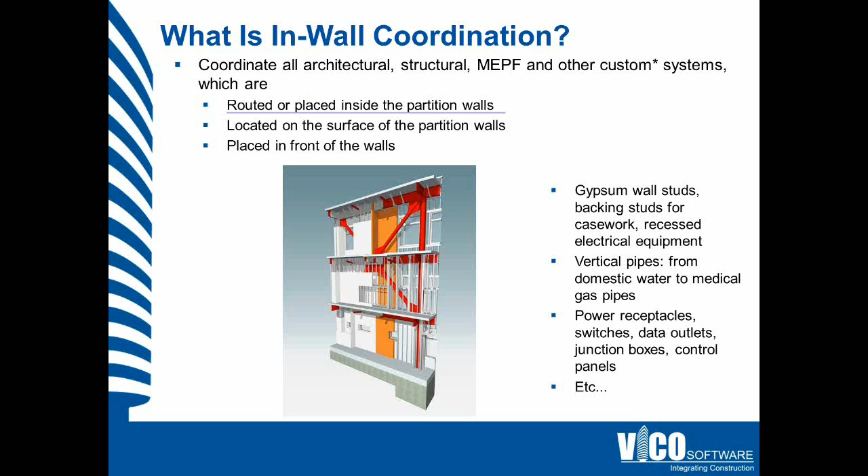If you want to see some examples, for the partition, what the partition walls contain inside, we can think of the structure of the partition wall itself, so the metal studs that hold the partition. Or if we want to place, for example, heavier casework on the partition wall, we obviously need some backing system for that, that you can see on this next image in red. So those backing systems are holding the heavy casework.

But we obviously also have some piping routed in the partition walls. In normal or standard cases, in standard building types, it is most likely domestic water or mechanical piping. But in case of a hospital or a medical building, you could also find medical piping, medical gases, and all the different kinds of systems.

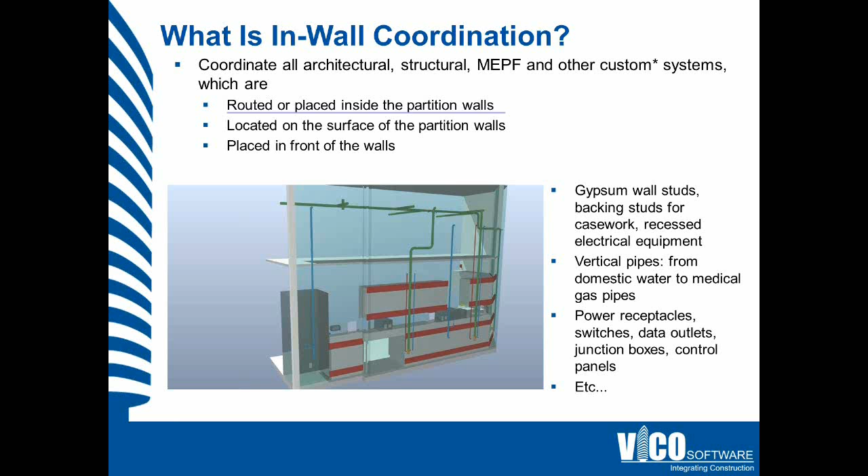You also have some small pieces of equipment, some elements placed on the surface of the wall. However, it definitely requires some supply system which is routed inside the wall. So if you think of data outlets, power outlets, switches, receptacles, fire alarms, those are mounted on the surface of the wall. However, they obviously need some pretty complex conduit system behind it. So it obviously requires space as well to place the junction boxes and to get from A to B in terms of outlets.

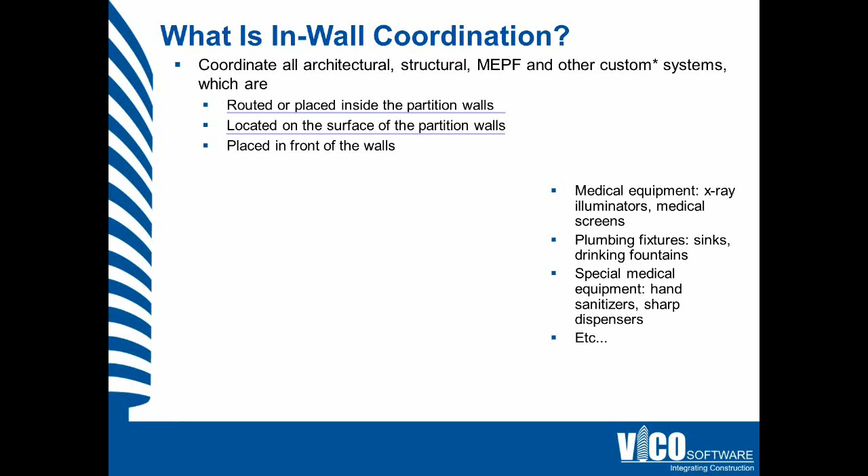Let's see a couple of examples of what we can place on the surface of the partition walls. And as my case study is a medical building, I will show you a couple of examples of such medical equipment. Let's start with the first one. I think it's familiar for all of us. It's a hand sanitizer. We can even find them in supermarkets all around the place. And it doesn't seem to be a big deal to place it on the wall. No one would really think that it has to be coordinated.

However, if you think of a medical building, a patient room, you can be sure that the nurses and the doctors who enter the room would touch such a piece of equipment first. So this would be the first thing that they touch when they enter the room, and also the last thing that they touch and use when they exit the room. So it's quite important to locate it in the right place, and it will drive and define the location of other pieces of equipment which maybe require supply and some routing in the partition wall. So it is really important to locate it in the right location.

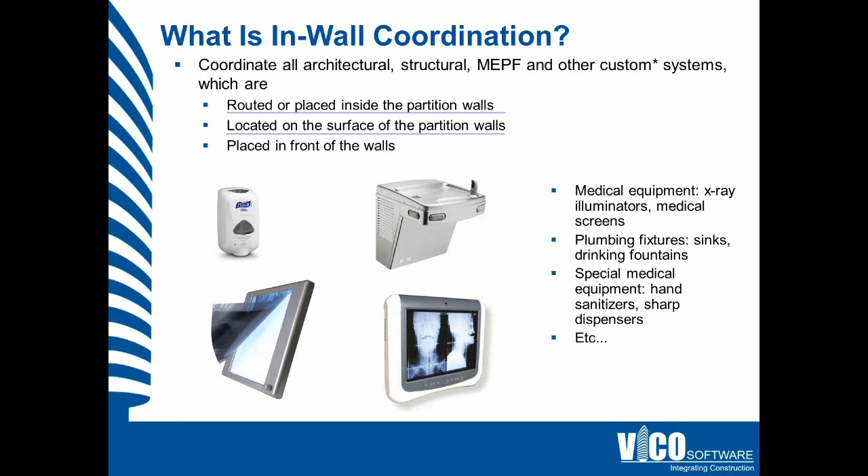As you can imagine, the doctors can review and see different pieces of information on such screens, so they have to be routed and connected to the right server. They have to be connected to the necessary computer. It makes it a bit more complicated to have the right data outlets in the right positions.

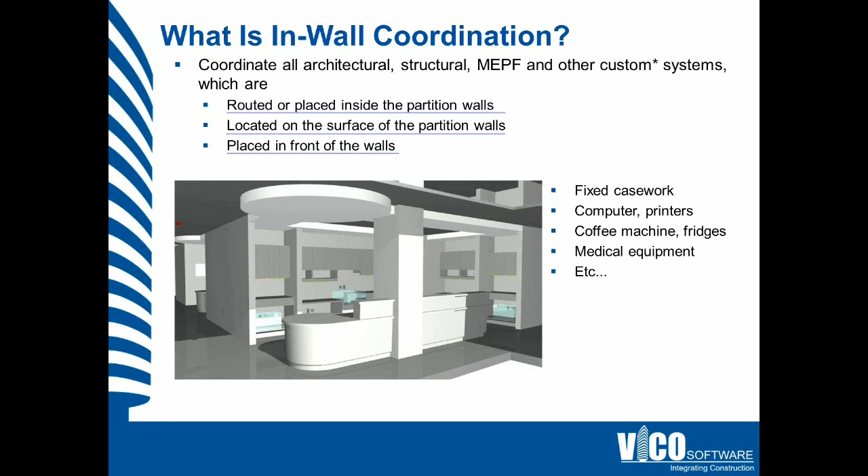And some examples for pieces of equipment or casework furniture which is placed in front of the wall, and I think this is the most common example. So you would find office spaces in any kind of building. It doesn't have to be a medical building. On the screenshot, if you can see it, I show a nurse station, and such a nurse station has lots of computers as well as screens, monitors, and obviously some printers and casework. So all these pieces of equipment had to be coordinated with, for example, the outlets which feed these pieces of equipment.

So the challenge itself is that the partition walls are rather congested, not only in medical buildings but in other building types as well. So whatever I mentioned to you previously and much more than that, those all have to be coordinated and placed in the right location. But the extra challenge that we were given by the owner is that he wanted to reduce the change orders quite dramatically. Actually, he wanted to reach zero change orders on this project.

The other extra challenge, because we had two of them, was that we were introduced to this effort rather late. So the construction was well ongoing when we started our service, when we started to coordinate all these systems. So the challenge was to find a workflow which will let us not only catch up with the construction, but get ahead of it and create valuable input for the design teams and for the construction team.

So Vico Services is a process-oriented organization. So we developed a process for this challenge. Obviously we accepted the challenge because we like challenges. So we put together a workflow, a unique workflow, together with the best practices that we developed for this effort. And as we pretty much do everything in 3D, that is our starting deliverable, we decided to accept this challenge with a 3D model as well.

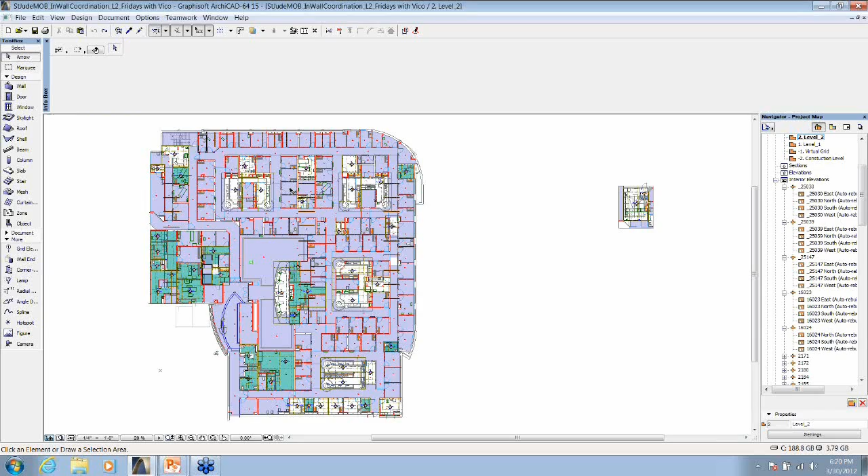So I will switch now to Archicad, because this effort was done in Archicad, and I think demonstration in the modeling application is going to be much more interesting than anything else. So I'm going to walk you through a couple of rooms, I think approximately 5 rooms. I'm going to show you 2 floors out of these 4 floors, and show you some examples of what we did during the in-wall coordination.

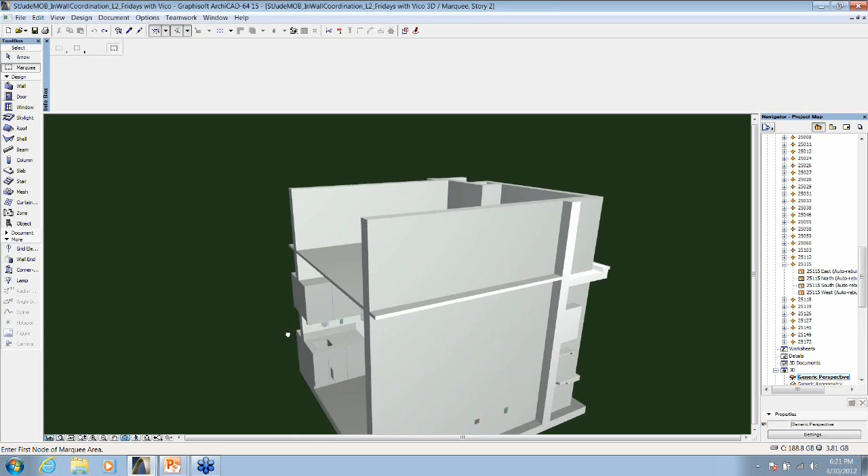So now you can see the second floor, and one room on the second floor. It's a patient care room, examination room, and let's see first of all how it looks in 3D. I just turned off a wall so we can look into the room, so we can actually see in the room. Nothing special, I have to say.

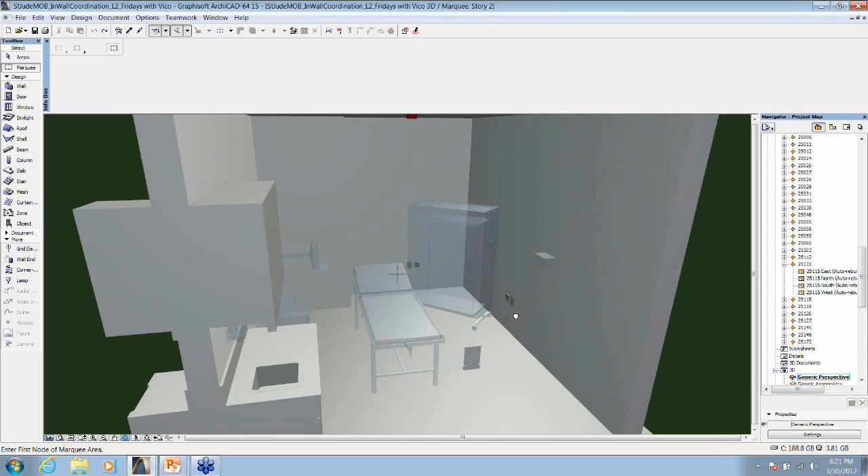So we have a casework, the hand sanitizer, biohazard waste bin, a computer that is necessary in such a room, an examination table, also known as bed, and some other pieces of medical equipment. Note that on the walls you can also see the necessary power outlets, data outlets that go together with the computer, as well as on the other wall which feeds this piece of medical equipment.

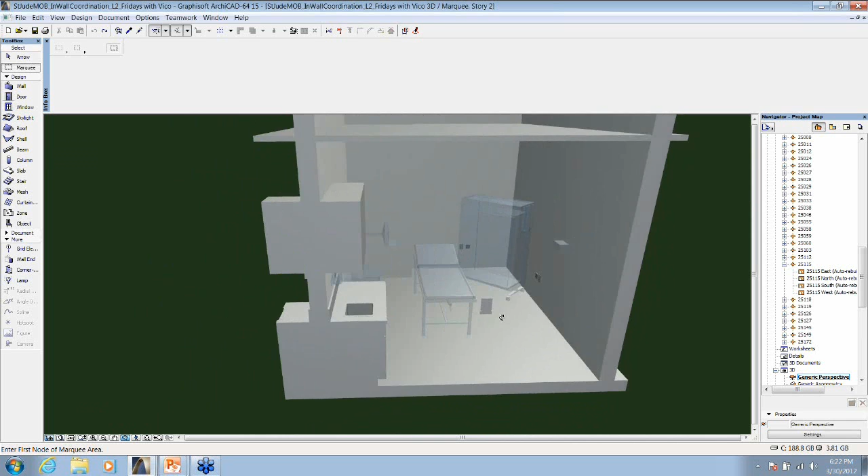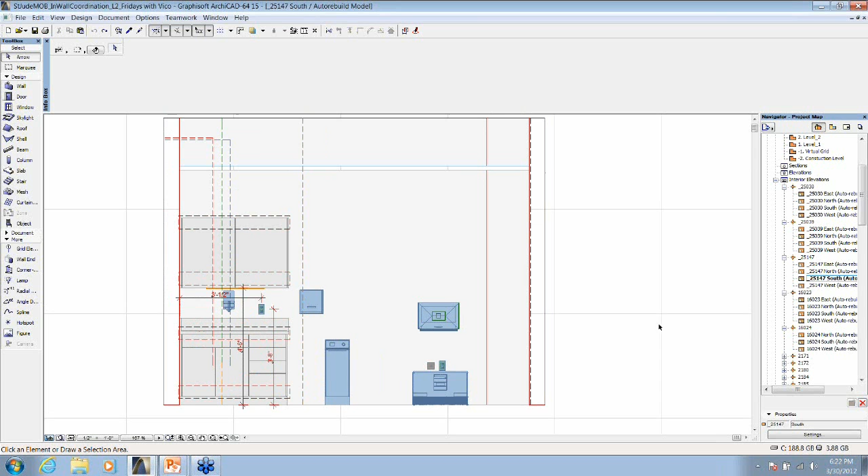So this is the 3D view that we quite often reviewed together in the weekly meetings, as well as introducing it to the end users. We not only have 3D views, but we also created 2D views, 2D elevation views. So let me show you a couple of these. You see the same thing as in the 3D view, the casework, the outlets, the waste bin, and the medical computer.

On the north elevation, you can see the view of the medical equipment. On the east elevation, we have more things going on. So here is another hand sanitizer that I mentioned that the nurses and doctors would want to use quite frequently, and different kinds of power and data supplies.

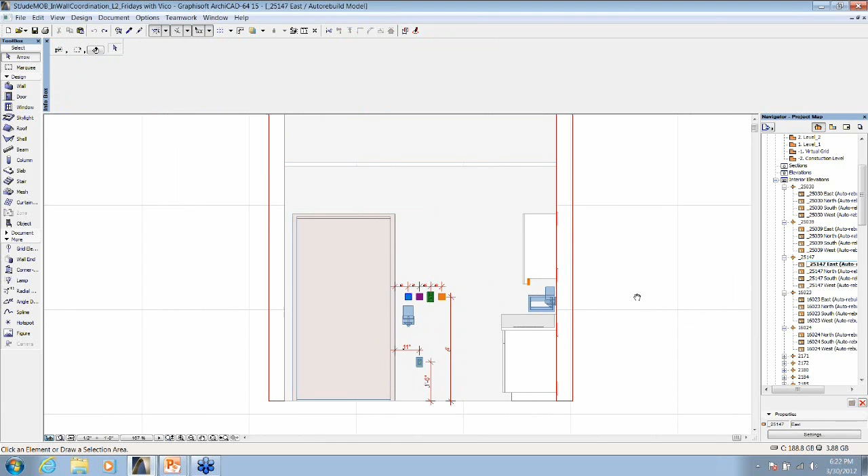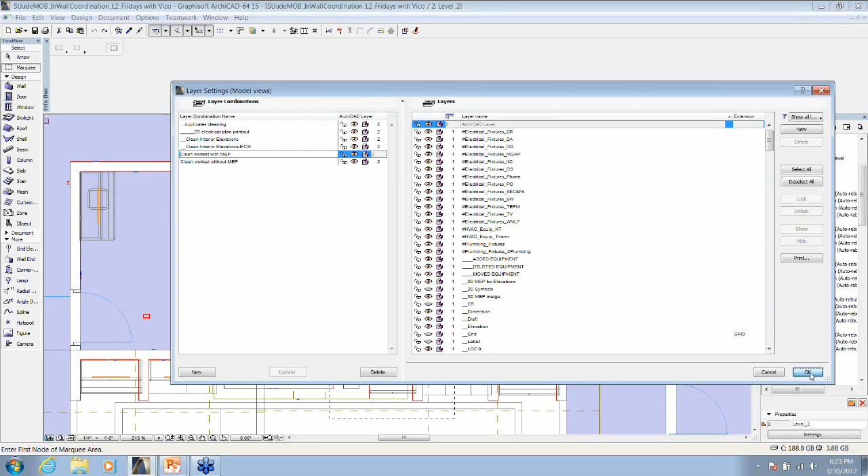What you may have recognized on the south elevation, let me go back to that, lots of dashed lines. And it is because, as I mentioned, we reused the data coming from the overhead coordination. So we actually knew where the standpipes, where the vertical pipes are going to be built and placed in the walls. It's quite important when we talk about coordinating and placing everything in the right location.

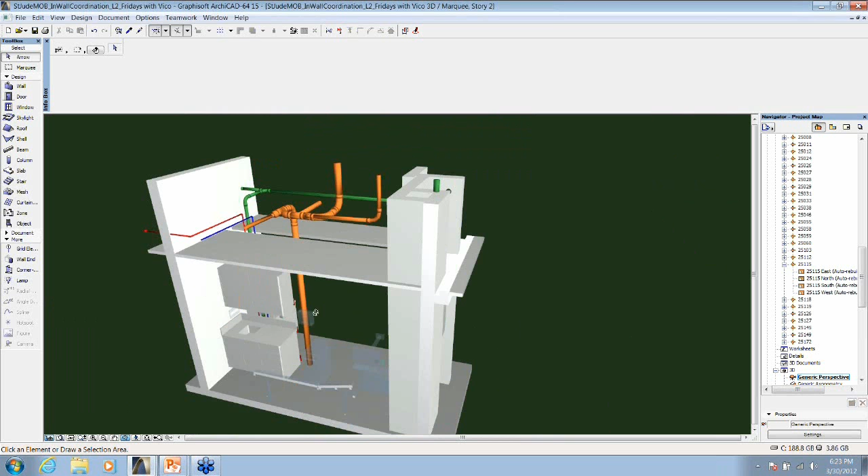If we review the same situation in 3D again, and if I turn off this wall to see inside of it, you can see that there is a pretty big diameter waste pipe which goes from the third floor down to the first floor, crossing the second. If I get around it, it's probably more visible. We have some vent pipes and domestic water pipes feeding that sink. Obviously, we cannot really place heavy items on such a big waste pipe, nor electrical equipment around the domestic water pipes.

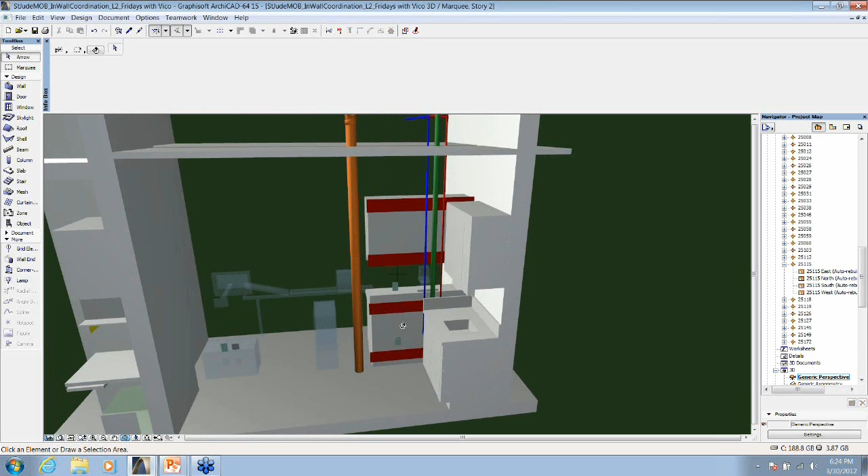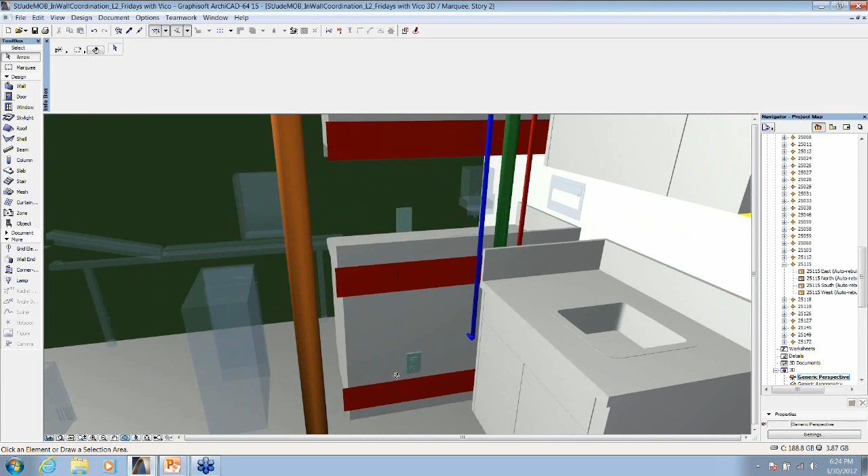The other beauty of building everything in 3D, and I think I will have a better example for that, but let me mention it here as well, is that we not only built the dedicated rooms which were actually coordinated, but also the neighboring rooms. So when we wanted to locate a power outlet on one of the walls that we coordinate, we actually knew where the other power outlet would go on the other side of the wall. So we could make it simple for the site team, and we could just align them to be able to speed up their process.

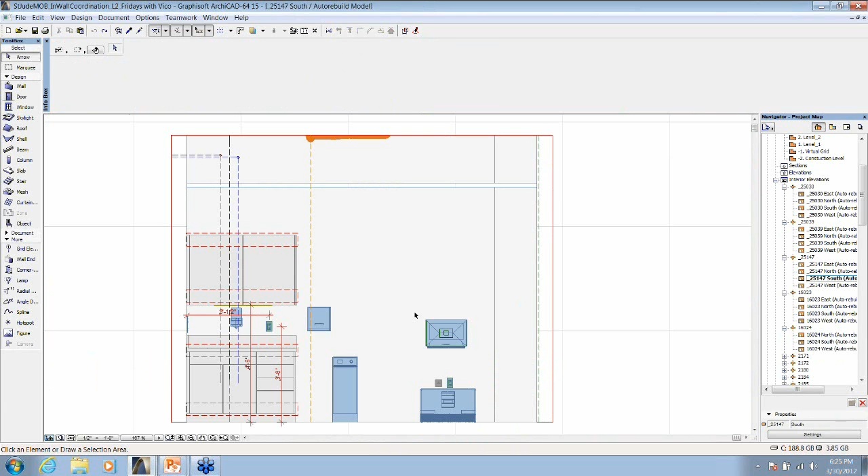So if I go back to the elevation view again, this is the reason for having these center lines showing the actual piping systems in the wall. As I mentioned, I'm going to introduce not only the rooms themselves, but some modifications that were required either by the general contractor, or subs, or the nurses. And in this room, I can show you a nice example that the nurses asked us to modify.

So when they reviewed all these rooms, and we had multiple patient rooms in the building, when they reviewed a few of them, they said that there are doctors who are right-handed and there are other doctors who are left-handed, and we didn't even think about it. And they said that some doctors prefer to stand on the right and the other doctors prefer to stand on the left. So their request was if we can just change the layout and turn this room, for example, to a left-handed room. Obviously, we could do this. It was not a big deal. So let me just show you what we did during coordination.

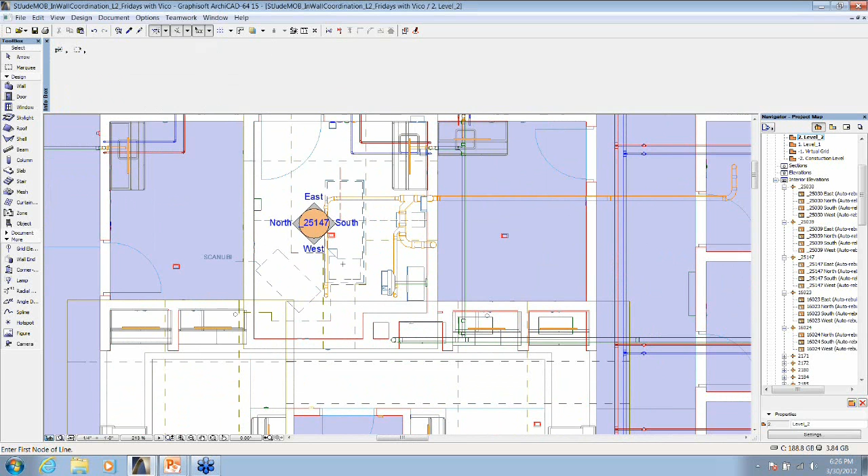It was this simple. So basically, with a few clicks, we could satisfy the end users and create a few rooms for them which were left-handed instead of right-handed.

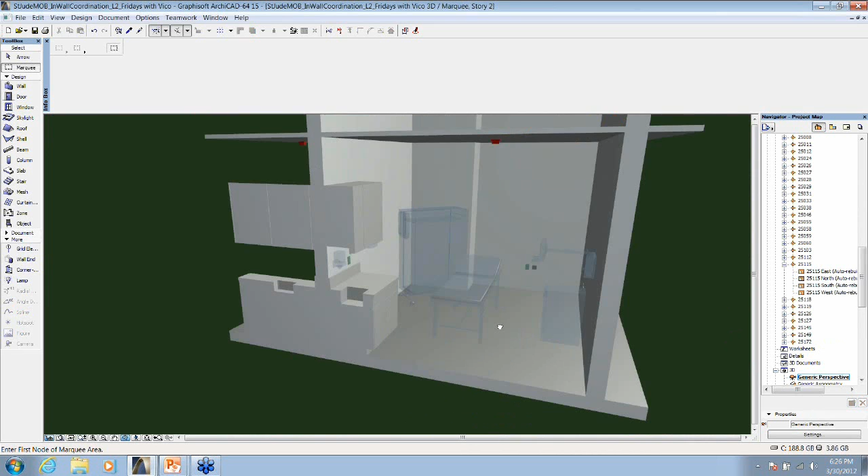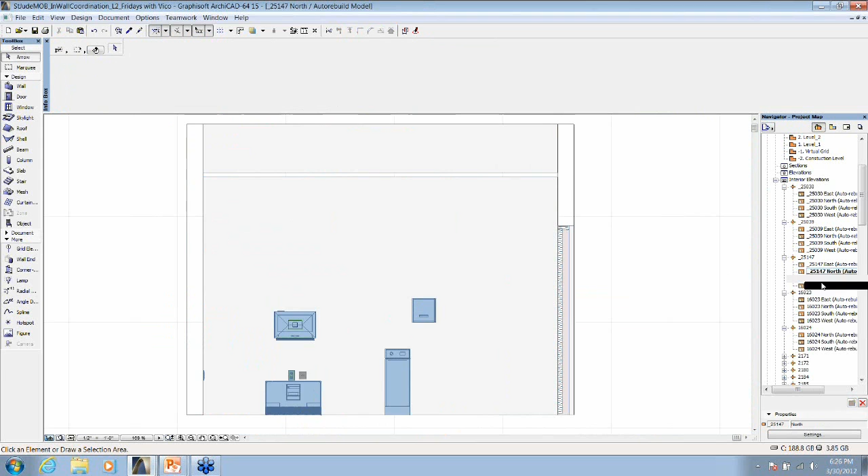If we check the same scenario in the elevation view, as that is also automatically updated, you can see now that the north elevation has now the medical screens and the computer, while the south elevation has changed as well, and only that big piece of equipment is standing there.

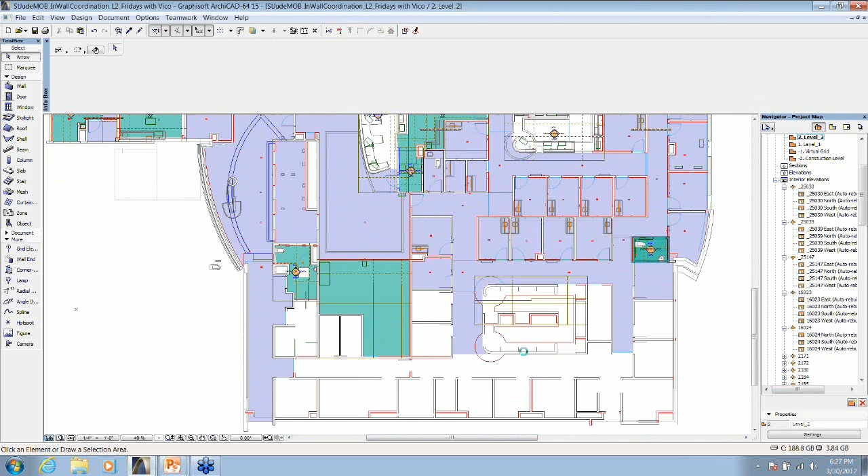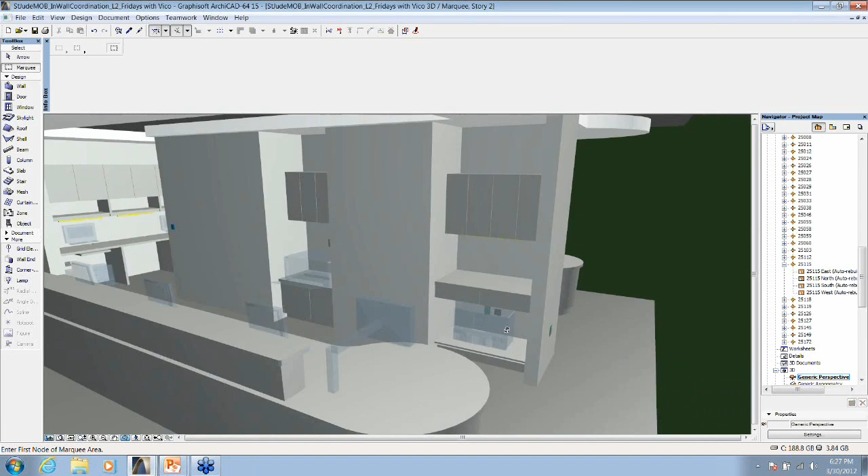So as I mentioned, we have lots of computers, screens, printers, and casework placed here. It doesn't seem to be complicated to coordinate it. However, surprisingly enough, we found many issues that we had to deal with. I'm going to show you one elevation only. This is going to be the east elevation of this location, and I'm going to show you two issues that we identified on this single piece of wall.

As you can already see, here is a note added per meeting. So when our team modeled and pre-coordinated everything, they found that the specifications ask for a computer in this casework. So they placed the casework, but they were wondering where the power outlet and the data outlet can be to feed that piece of equipment. So they made some notes suggesting that we should place power and data outlet there, and the GC together with the owner could verify that it's a good assumption, good suggestion, and we definitely should place some power and data outlet there.

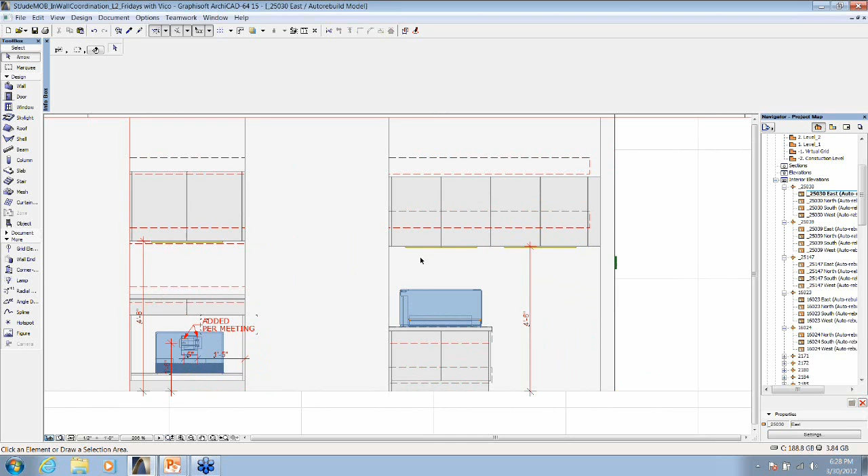As well as in case of this printer, you would think that a printer requires data outlet as well, just like power outlet, and we cannot really see anywhere around this printer. The reason for that is that we took the electrical drawings and modeled everything that we found on them, and actually in this area we found power and data outlet, but it was located wrong, so they wanted to place it behind the casework.

If we follow the construction sequence of placing a casework versus building partition walls, we know that partition walls come first. We place the outlets there, and only after that comes the casework. So it would have been quite a problem if the outlets were placed behind the casework. It would definitely have become a change order that we wanted to avoid.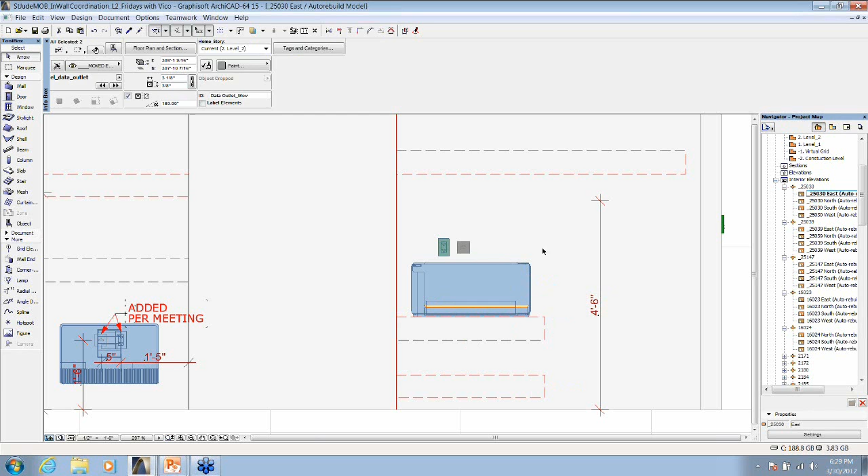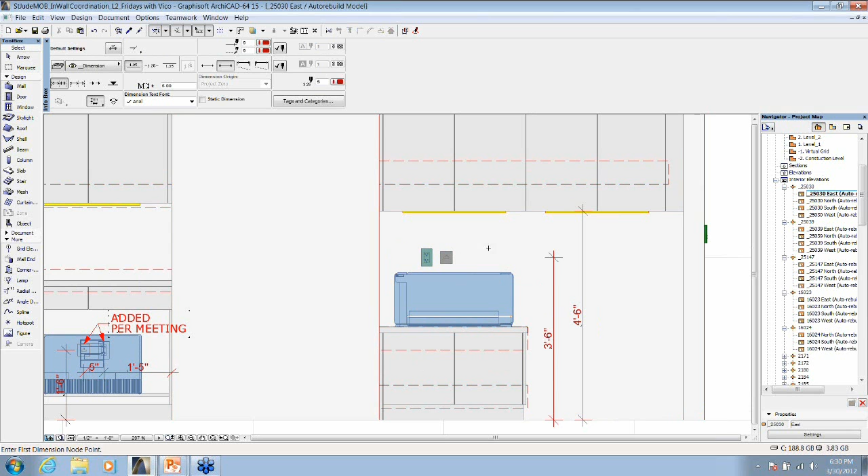So the thing that we could do is just simply elevate it to the right elevation height, so it's not clashing any longer with the casework, and there is easy access to it above the printer. To finalize the 2D view, we just had to add some dimensions, and it was ready for the nurse's review.

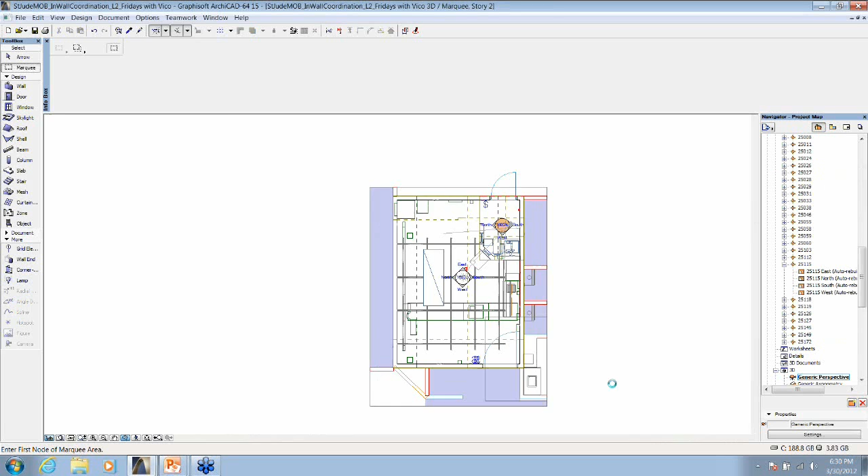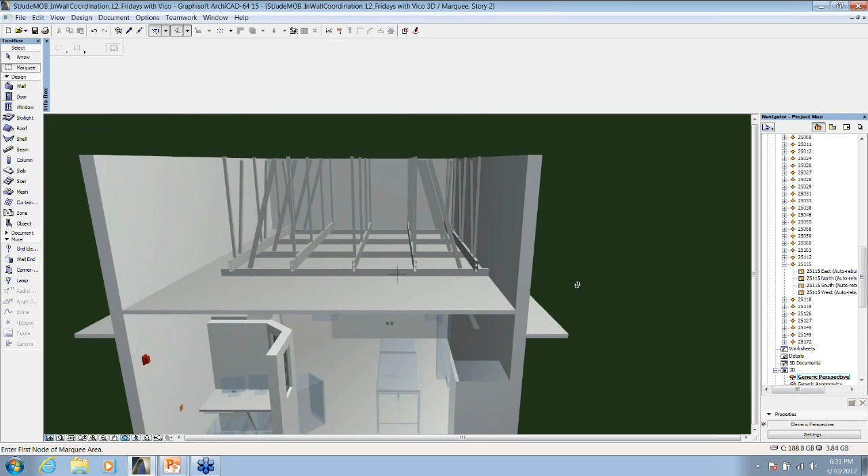I have another example, however it's not from the second floor. I just copied one example from the first floor, because I think this is what the nurses enjoy the most. So this is X-ray, but let me show you in 3D rather. This is an X-ray room. You can find the examine table again. The X-ray machine is represented just simplified with boxes to show the actual space requirements. Note that overhead we have the holding supporting structure of this heavy equipment.

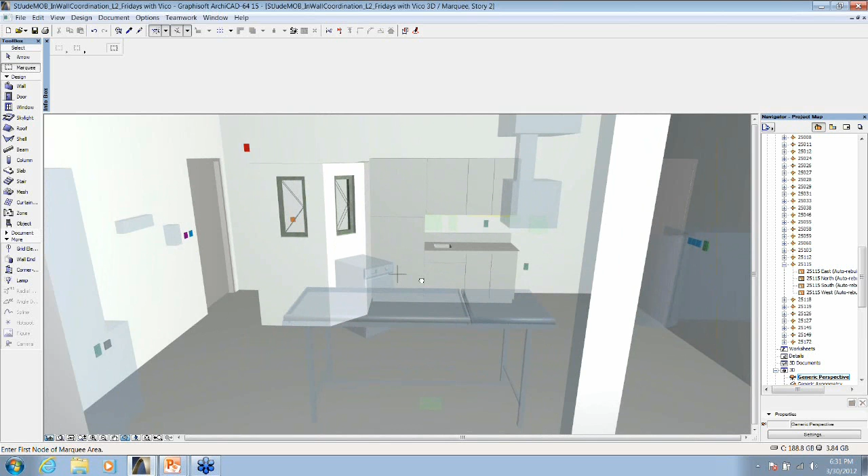And as you probably know, such a room requires special equipment which is controlling the device, and it requires that the nurses are staying in the actual room, but it's not too healthy to have too many X-ray examinations, so they need a small space which is defended by a shield wall. It's not a simple wall, it has some metal in it, and it's quite thick. The nurses can stand behind these walls while the X-ray examination is ongoing.

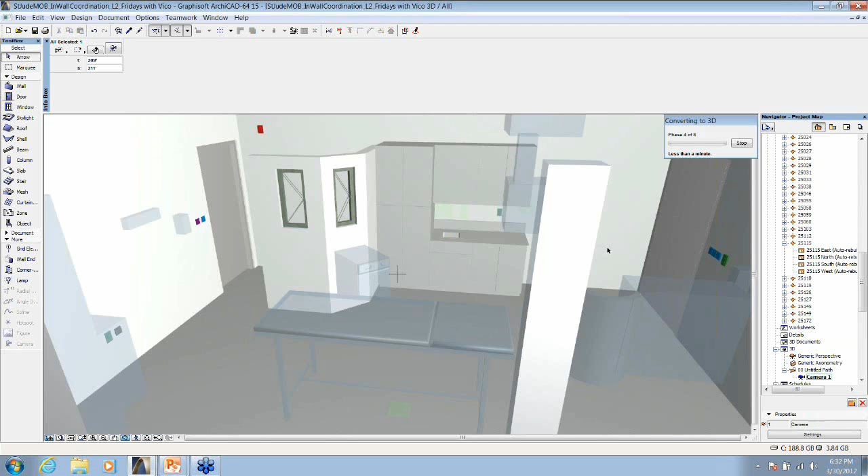So the nurses said they want to see what they can actually see when the examination is ongoing. They want to have eye contact with the patient all the time. So it was easy to create a 3D view for them and just check what they would be seeing. And we found that not too much. Basically, they would see the leg or the foot of the patient, which is probably not enough. So they asked whether we can just make these windows a bit bigger, because it is not satisfying their needs.

Obviously, as we are talking about a virtual environment, it was not a big deal for me to change it and make it bigger. But luckily enough, we were in time. I mean, the owner could order bigger examination windows, and they could be changed to create a better working environment for the nurses and the doctors.

Obviously, if it was only recognized after the opening of the hospital or the medical plaza, it would have been way too late, and changing these windows would have cost much more, because these windows would have been already ordered and placed, and most likely for a few days, by changing these windows in these not too simple partition walls, even the X-ray rooms would have been closed.

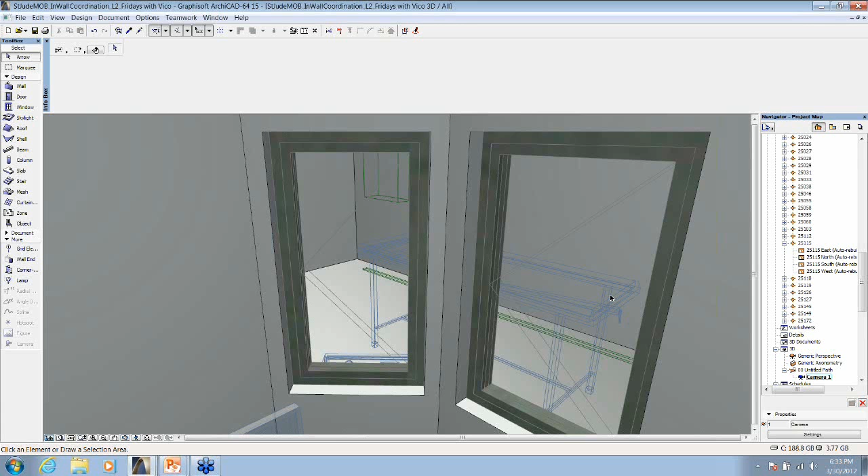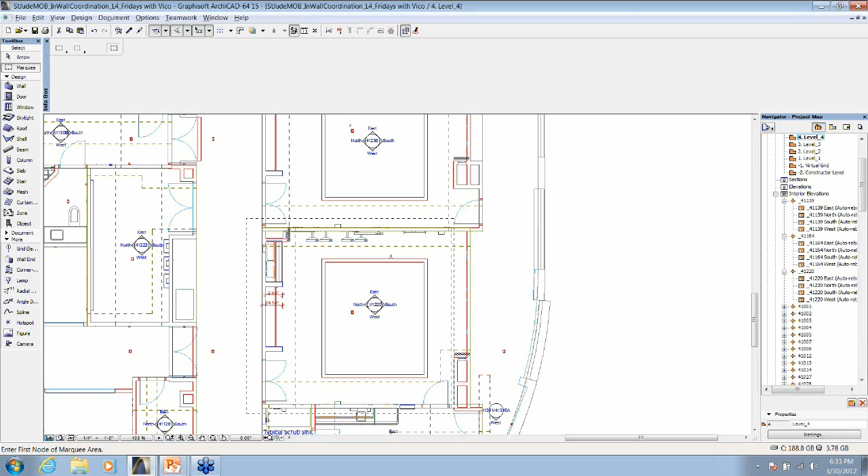So a few examples from the first and second floor. Let me just jump up to the fourth floor for a second, and I think I will show you an operating room here. It was already in my presentation as well. I just want to introduce one thing that I mentioned on the second floor.

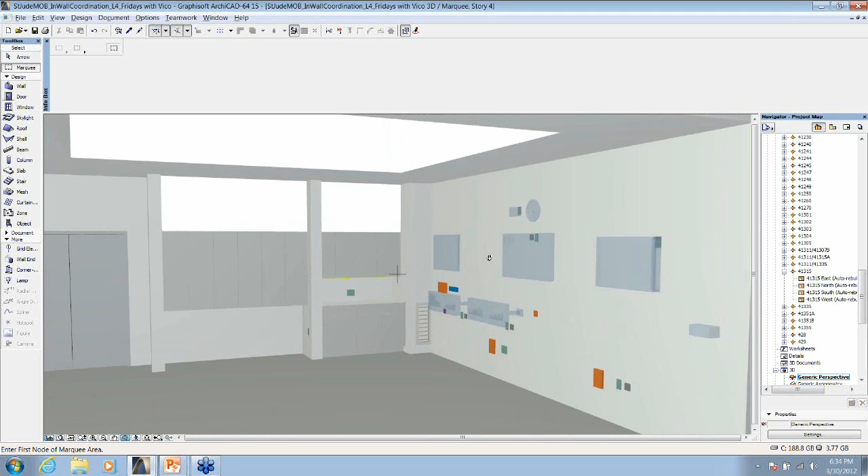So this is an operating room, lots of screens with the necessary data and power outlet, floor lighting, some whiteboard, other screens that go on the walls, the well-known X-ray illuminators, and on the other side of the room, all the necessary switches and thermostats which control the room.

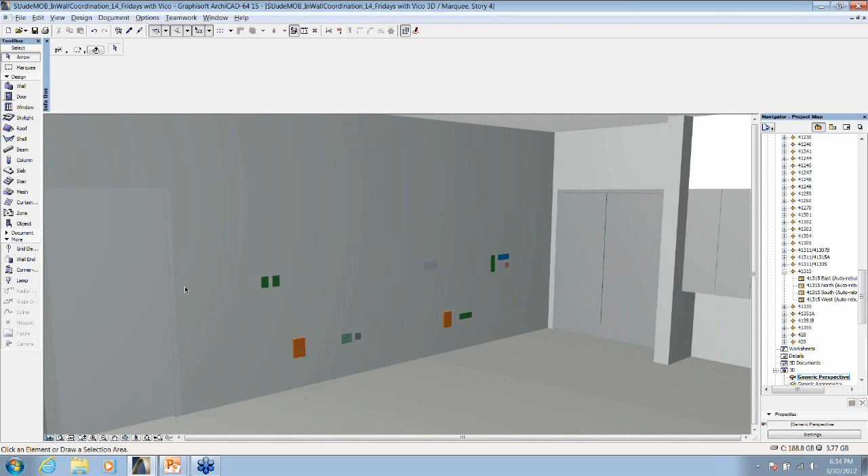But you can probably see already on this view this is a door, and usually, as you could see on the other elevation views, the thermostats and other switches are placed rather close to the door, so when they enter the room they can control the room. For some reason it is placed far from the door, and we have a good reason for that.

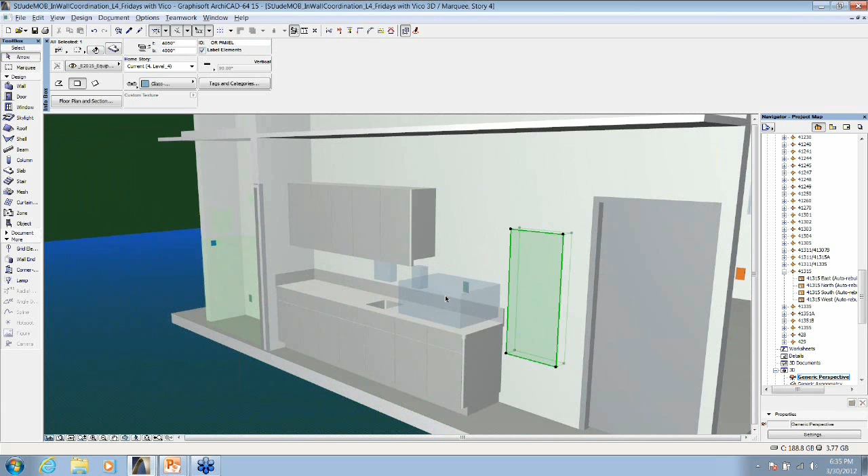If I go to the other room, I find that here is an OR panel, an operating room panel, and this controls all the electrical happenings in the operating room. And if I go back to my actual operating room, you can see that this is a recessed panel. It's quite a big panel, and would take almost the entire width of the partition wall.

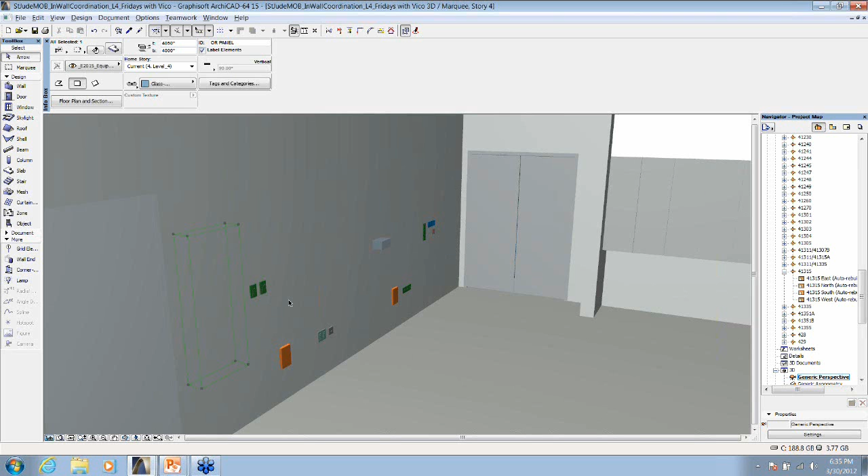Therefore, there is no way that we could route the thermostats in that location. So those thermostats had to be moved a bit further from the door. If we check it in the elevation view, you can see this recessed panel here, as well as all the other well-known plumbing systems going through the room, through the partition of the room.

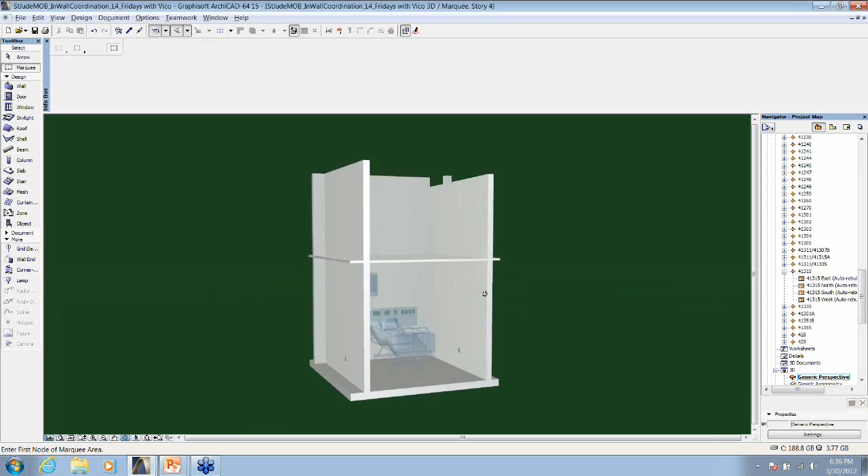And the last example that I'm going to show you is a recovery room. Holly mentioned that she thought that we only coordinated the walls behind the patients, but we did a bit more. But this was definitely one of our services as well, to coordinate what goes on the head walls and what we want to place on the head walls.

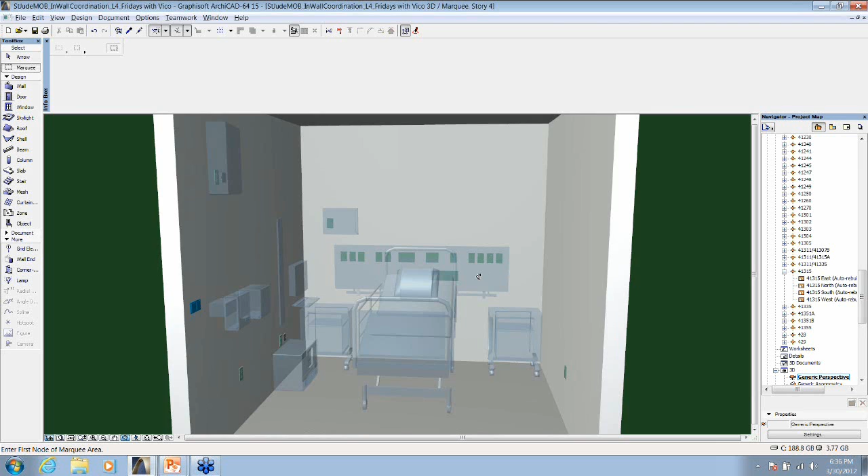The head wall is actually a piece of wall and equipment which carries lots of different medical equipment. We have the bed here, we have computers and different kinds of screens. Actually, we have even a television on the wall, so the patient can recover.

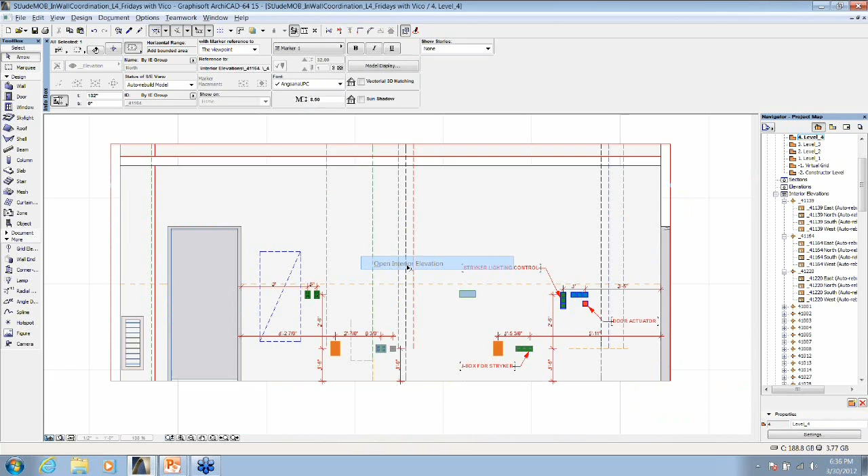When the nurses and doctors again reviewed the elevation that we provided to them, they were not fully satisfied. However, we coordinated everything, and that was our first task, to coordinate everything. Second task was to satisfy the end users, and they found that, for example, the nurse calls, the exam lights, and wall phones were supposed to be placed next to the head wall, not on the head wall.

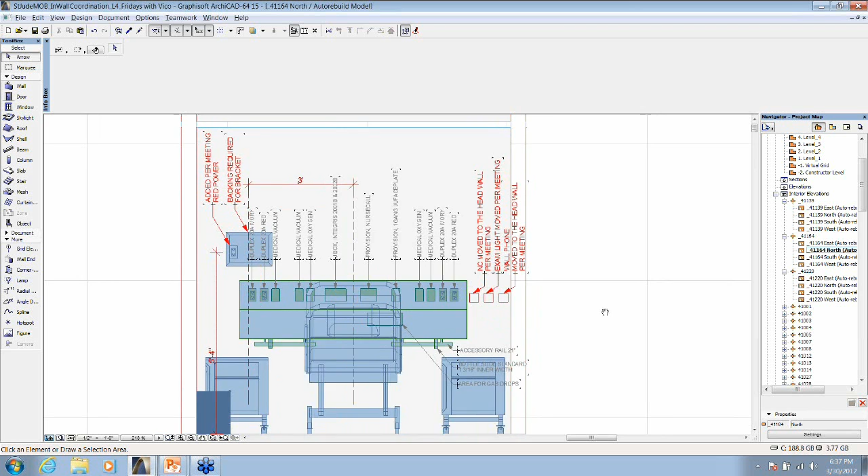So they asked us and the general contractor to change this setup and move all these pieces of equipment to the head wall, because that's much more useful for them. So that's about it in the application. Let me go back to the presentation for a second.

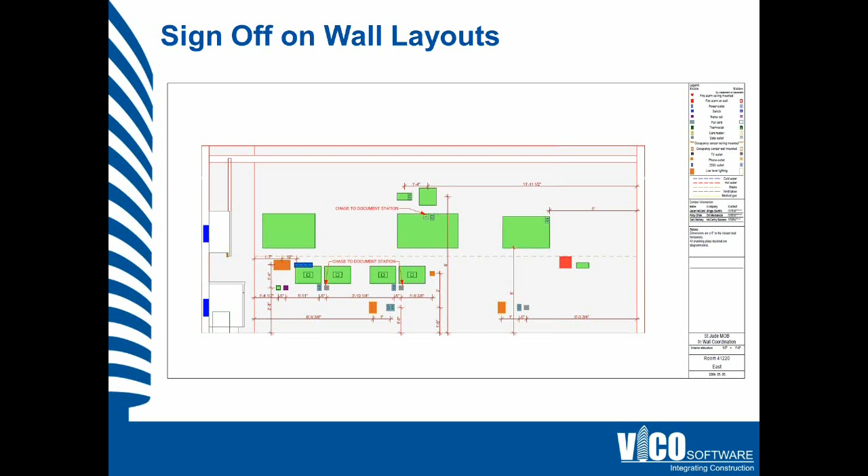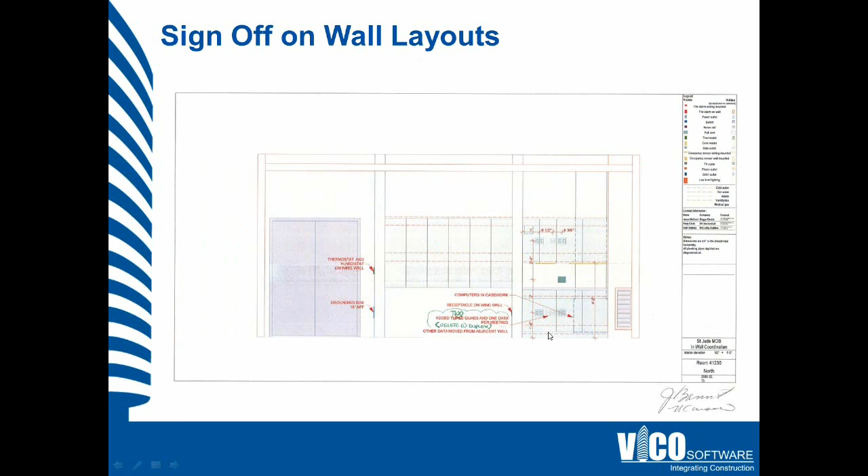We had the 3D views validated by all the subcontractors and designers, the GC and the owner, as well as the end users, the nurses and the doctors. And that's when it was time to print out the documents that we created, both the floor plan and the elevation view documents, and just have the sign off on them. You can see one sign off on this document with the latest change that they required.

So the conclusion. We started out with aggressive targets. The fact of trying to reach zero change orders and joining the team when construction was already ongoing made this project difficult. However, as I mentioned, we love challenges, so we took the challenge.

I think the keys to successfully fulfill the requirements was the workflow that we worked out, so building everything in 3D, taking every piece of information with us together with the contract documents and the RFIs which were ongoing in the field, and incorporating everything in the model, having it done with a team of expert modelers, and pre-coordinating everything based on the rules, the code requirements and the rules that we built up ourselves, the system priority structure, and also reusing the already existing data that helped a lot to reduce the duration and the cost effect.

And finally, to validate the work environment not only by the engineers, but we definitely needed the input by the end users as well. So following this workflow, we managed to create a workspace for the end users which they really like.